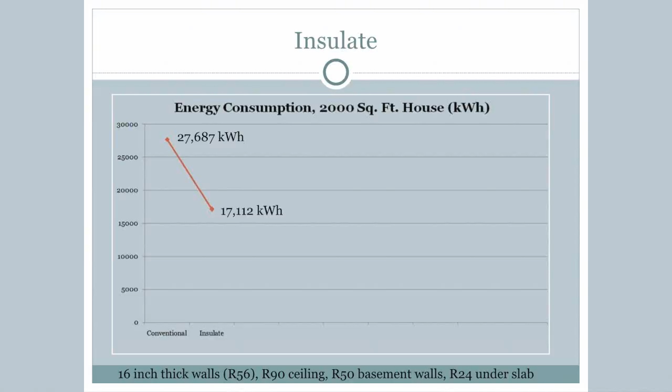There shouldn't be a concrete slab poured in Edmonton that does not have foam under it. It's insane. It will bleed energy for its entire life into that earth underneath. And so that's a crazy conventional practice that I really hope ends soon.

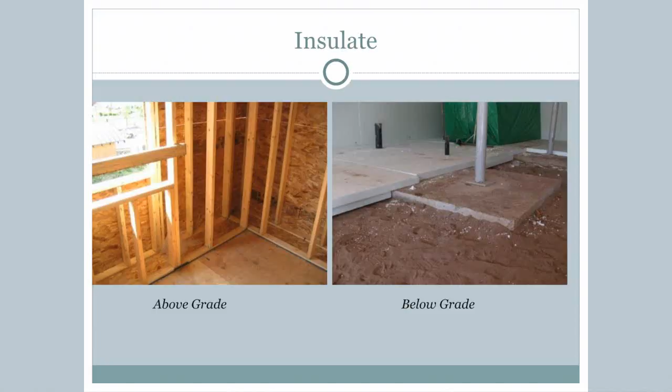So then what we did, moving from a conventional house, now we've insulated it, is sealed it. And so Peter has actually developed this framing technique by which very, very high levels of sealing can be achieved on a house, which means that not a lot of air from the outside can flow through the walls.

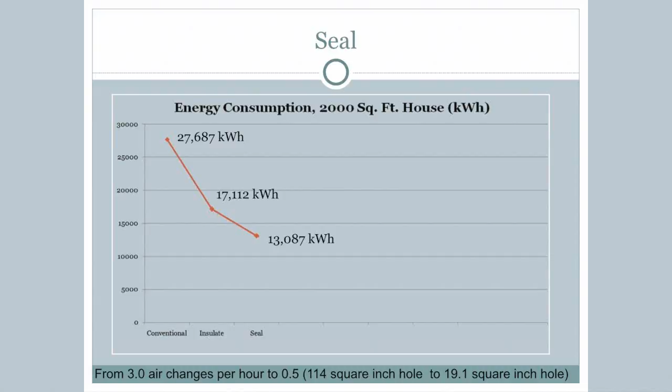Okay, so again, you can't see the words there, but this is moving from 3 air changes per hour, which is the equivalent of a 114 square inch hole, so something like that, to 0.5 air changes per hour, which is the equivalent of a 20 square inch hole in your house, if you added all the little leaks and cracks. We went from 17,000 kilowatt hours in heating load to about 13,000. So we cut it by 25% or so again. And this is Adam, the framer, doing some sealing details on the house.

So the next thing I did in the computer modeling was I just took the house and turned it towards the sun, 90 degrees. So just by doing that, recognizing that there's this big ball of fusion in the air, and actually designing a house with that in mind, we got 2,000 kilowatt hours more out of it. So another 15%. And I think lots of houses these days are built in large suburban areas, and they are pre-designed models that don't take into account which way the house is oriented towards the sun. So that's insolating the house, not insulating. In other words, bathing it in sun, right?

So then we made a huge jump from 11,000 kilowatt hours to about 3,700 by buying the best windows that money could buy. So fiberglass windows, triple pane. That's another thing. I morally disagree with the selling of double pane windows. Just don't do it. Don't buy them. Don't sell them. We live in Edmonton. It's cold here. So that time it lopped off about 60% of the heating load.

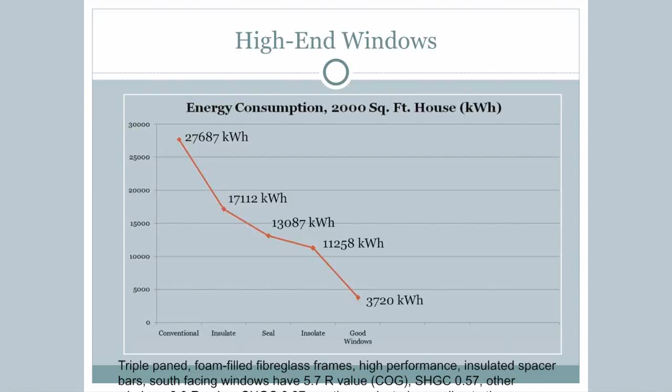Right. So the house, this is facing south, obviously, has huge windows and a lot of sun coming in. And again, we got very high-end windows. So the last thing we did was we added concrete floors. I think about 12 metric tons of concrete on the main floor, and then another 12 on the second floor. Now because we have such large south windows, if we didn't have this mass in there, we would fry in the fall.

So the sun is low during that time, and it's still relatively warm out, and so it would get too hot in the house. But with the concrete floors, they act as these heat batteries, and they keep it relatively comfortable. And then once the sun goes down, they radiate heat for the rest of the night.

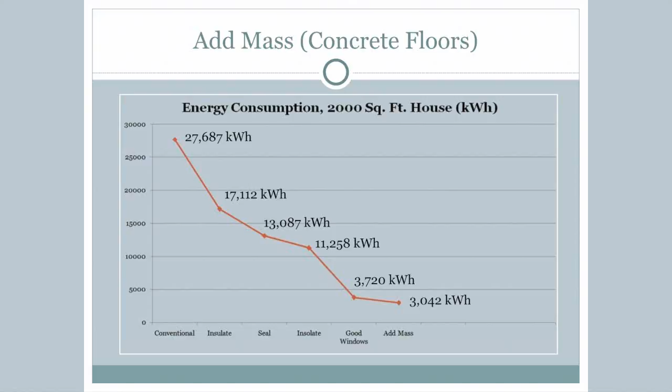So other aspects of the house, we don't have a dryer. We haven't had a dryer now for 15 years, because I didn't have one in my old house, and we're still around. So we've managed to survive without a dryer. I know it's crazy talk in the first world, but you can lop off 1,000 kilowatt hours a year of energy use, and I managed to make it here, even though I'm hanging my laundry all the time. No, actually, it's only like 20 minutes a week for me, and another 20 for my wife. We hang dry our laundry.

We also had energy efficient appliances and lighting, permaculture landscape for the food aspect. We live in a very walkable neighborhood. That's actually not true anymore. We just bought a car. My 2 kids are in hockey. Hockey broke me. After 7 years living without a car, now we have one.

We also wanted to increase density, and at the time there wasn't a basement suite allowed on the lot with our zoning, but now there is. So our modeling showed, and it isn't exactly the same as what I ended up at because we went through so many different iterations, about 3,000 kilowatt hours a year for space heating, about 3,200 a year for domestic hot water heating, and then 4,400 a year for our appliances, for a total of about 10,500.

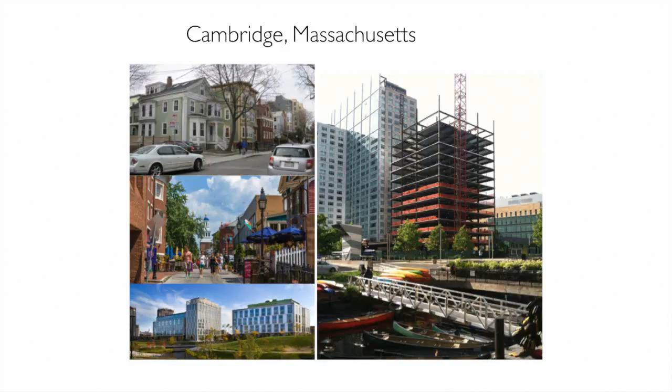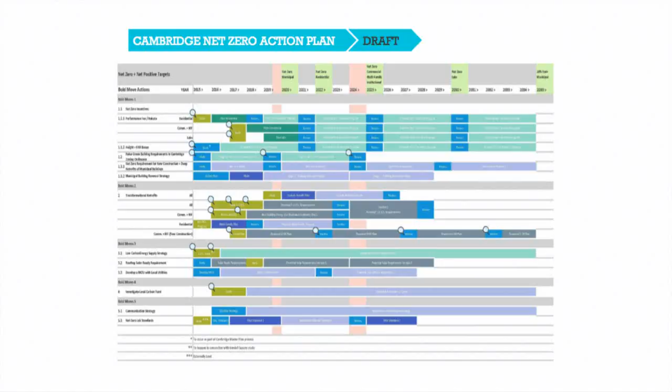They're building net zero energy buildings in Massachusetts. They're aiming for net zero energy in all new buildings by 2030, building jobs and energy around it. The city of Cambridge, who's really taken a kind of a gritty look at this, is aiming for net zero energy for the whole city, not just for the building. And they've done a really comprehensive roadmap where they've looked at every energy component: driving, transportation, building energy, municipal services, and developed a roadmap to get them down to around 70% by 2040.

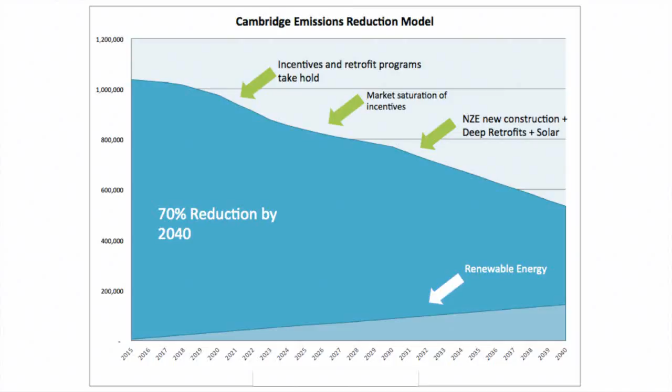So this is what we're up against if we want to be leaders. We really got to get going, and I think net zero energy housing is part of that. The DOE has done a great job in helping builders sell this stuff, looking at the value proposition, which I'll talk about a little bit toward the tail end here.

And then the passive house movement, I mean, based on what our Saskatchewan pioneers have built, they've taken this fairly simple approach and built the highest building energy efficiency standard in the world. They've now got about 30,000 of them in Europe. They're getting to be more and more in the US and Canada. And it's by far the best platform for net zero energy building.

The City of Vancouver is now recognizing it in their planning process. So is New York. Even President Obama is pointing at passive house as the way of the future. So I'm not going to dwell on this, but in addition to looking at energy, they've also gone further and looked at durability, and they're designing building assemblies that are not only energy efficient, but they're also highly durable.

Because when you think about it, the embodied energy of a building is the energy that goes into its construction, and that's all up front. That gets expended today. The rule of thumb is that the embodied energy of a building is roughly 10% of the total energy that building will use for heating and other energy needs. But if you cut that down by 90%, all of a sudden your operational energy and your embodied energy are equal. And the only way to do much about that is to make darn sure that building is going to last twice as long, because then that number looks better.

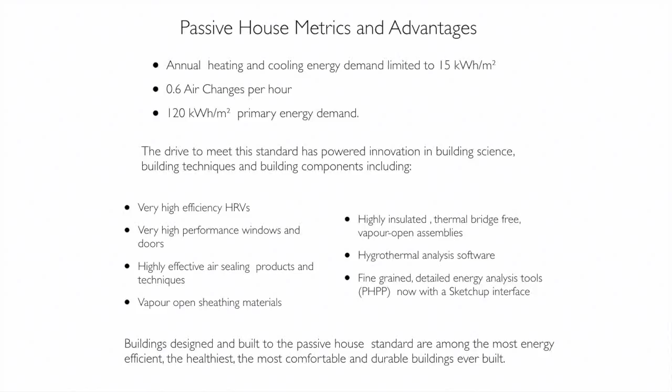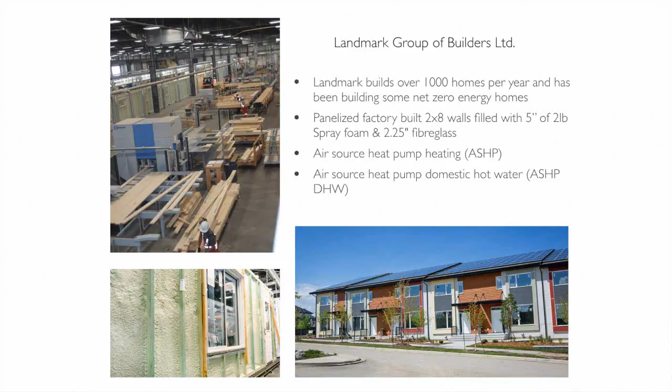And so we've borrowed and stolen all kinds of little bits of the passive house technique to make our houses better and to make them more affordable. And back here in Alberta, we've got Landmark. Reza said this morning it was about 880 houses last year, and they're moving towards net zero energy houses in their factory, and have taught us that you can actually heat houses in Edmonton with air source heat pumps, which I'll talk about a little bit more as we go along. And then there's the Mosaic Centre here in Edmonton.

So we're on the right track, but our numbers, when the mayor brags about having 35 or so, I don't think he used that number, but that's what we have now, net zero energy dwellings in Edmonton. That's great. That's more than anywhere else in Canada, but it's also terrible that 35 is the highest number in Canada. We've got so far to go.

So we've done 10 now. These are the first 6, the first generation where we were focused heavily on passive solar, and they were on decent sites, except for the Holyrood one, which had a really huge, expensive solar thermal system. But basically we were taking advantage of the mass and glass, or at least glass, approach to get a big chunk of our heating energy from the sun, and we're still doing that, but there are limits, and besides, we can see with Conrad's house, we're not quite there, and that's true of most of these houses. I'll show you one in a minute that's doing great with that approach, but in all these cases, we've learned from the house before, and we're constantly fine-tuning.

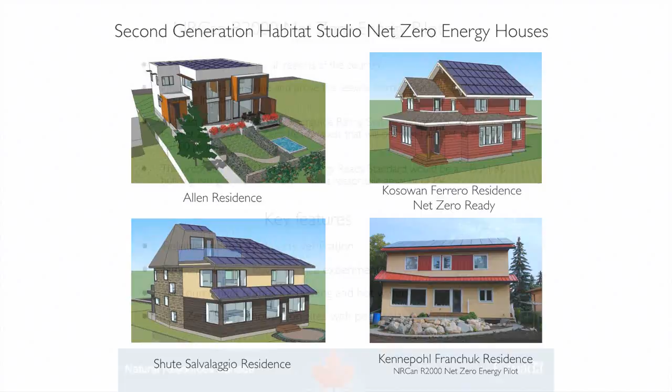The house in the bottom right there was part of a program that Natural Resources Canada has run across the country to try and mainstream this more. They've restricted us to simple systems, no more science experiments, and we're happy to say that was the first one finished in the country.

But even the CHBA, who haven't been the most advanced in terms of leading energy efficiency, are on the bandwagon. They're seriously working towards a net zero energy labeling program that will be available across the country, that will give homeowners quality assurance so that when the builder says it's a net zero energy house, they've got a label on it that's third-party verified and lets that homeowner know they're getting what they're paying for, and it's not just some builder salesman like me telling them this is the best thing since sliced bread. It's really something you can take to the bank.

So in all of this, our recipe hasn't changed that much. As I say, we've been fine-tuning it, but we learned after about the third house that really it didn't need to be that complicated. It was a step-by-step process that you could take to net zero energy. I'm not going to go through the whole thing, but I will talk about some of the things that we're doing differently now than we did before.

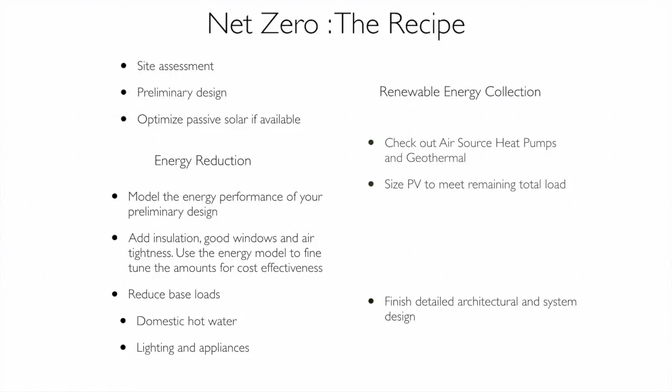So we're capturing most of it. This house is actually producing a surplus of about 4,000 kilowatt hours a year, year in, year out since it was built. I mean, Conrad's got 5 people living in his house. We've got 1 living in that house. That's probably part of the difference.

Plus, I think that we're sort of hypermiling this house. Like you know, when you buy a Prius and you coast down all the hills and squeeze every bit of energy. Well, I think the homeowner is doing that here, but nonetheless, it sort of works that way.

And so after this, I thought, oh great, let's just build on perfect lots all the time. Well, the fact of the matter is, perfect lots don't exist. Maybe there are 1 in 20, 1 in 30 in Edmonton. We've got these lovely boulevard trees. We've got other houses. Most of them face the wrong way. So obviously that's not going to work.

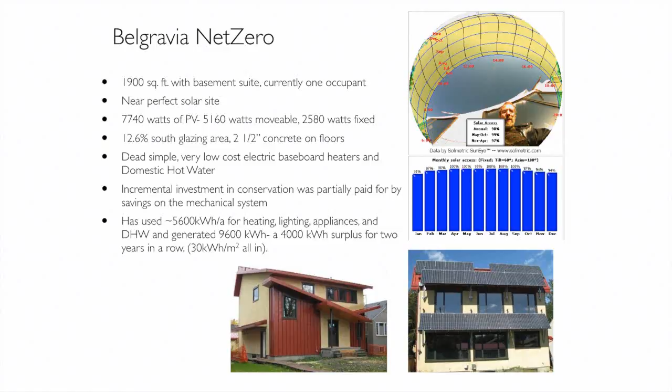So you can see on this house we've angled the roof so that we got the solar panels facing at the optimum angle so we get the most amount of juice out of every square foot of panel. Well, that's changed too. Now that they've gotten so much cheaper, we're actually sloping the roof the other way so we get more area to put more panels on. We're finding we're putting a lot bigger arrays on the roof, and that we need them to make up that sort of shortfall. But it's kind of interesting how that has changed.

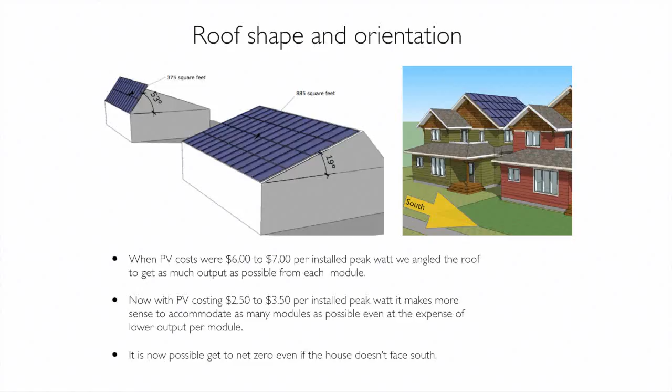We're also finding now we can get to net zero with east and west facing houses by just getting the sun over top of the roof. And I think this is something that Landmark has found in their work and makes it possible. Because if it's a solution that doesn't work on anything but the perfect lot, it's not really the solution. One thing that hasn't changed, and Conrad talked about it a little bit, is the need to start off with modeling.

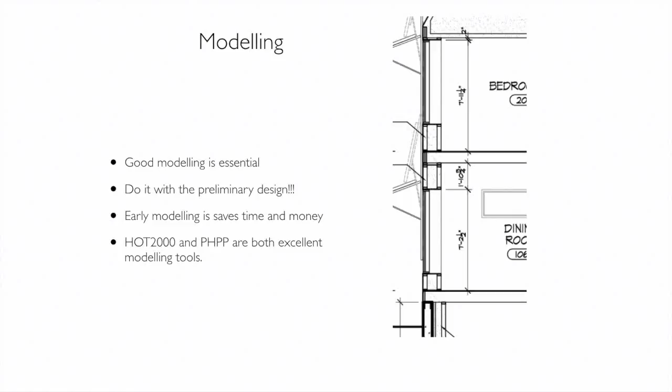I apologize to anybody who was here in the previous session, but if you don't start with good modeling, you can't possibly get there cost effectively. It has to be done early. I've had people come up to me after giving talks, and they had just done their building. This one was a farm couple in Manitoba, and they wanted to do the right thing. They put in lots of insulation, but they didn't pay much attention to air tightness, and they only put in double glazed windows, and they weren't going to get there.

The other guy was a mechanical engineer. He built with 2x8 walls, and also didn't pay too much attention to air tightness, and there was just no way that was going to be an energy efficient house. He had so much wood conducting energy through those walls and no continuous layer of insulation. He's a mechanical engineer, and he didn't do any modeling, and both these guys are done. They're not going to fix those houses ever. And I mean, it's simple.

The energy model tells you where all the components of energy loss are going in the house. You can easily play with the dials and say, what happens if I add, in this case here, a couple more inches of insulation to the floor? How much energy will it save? How much will it cost? What's the cost per kilowatt hour per year to save that energy? And how does that compare with the last increment on all the other things, the attic insulation, the wall insulation, the air tightness, the efficiency of the HRV, the efficiency of the heating system?

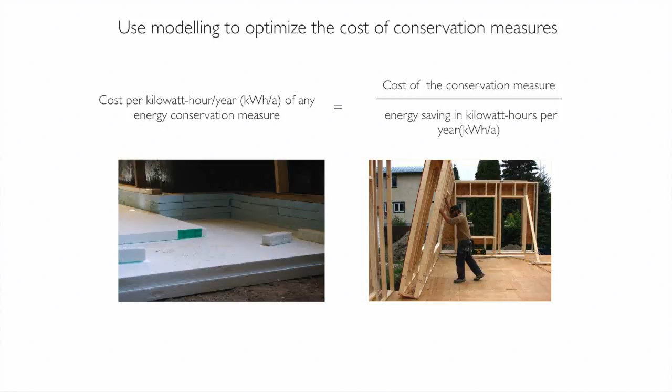You can use it to dial all that stuff in so that you can get the lowest possible cost solution for your building. And you don't have to do this many times. We've done this, and we kind of have a formula now that's our starting point in every building. And unless we see some kind of anomaly, it's not much extra work.

And one of the things that we've learned from the passive house approach is how important thermal bridging is as the insulation levels go up. So you can see, if you have an R15 wall, the amount of conductance from thermal bridging isn't that big a proportion, but once you get up in, say, the R40 range, that's looking like a bigger number. It's like bigger than the conductive losses through the wall.

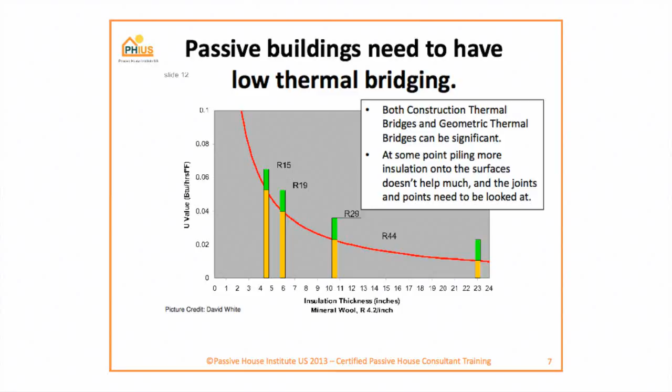So it's really worth looking at these little details, and one of the great things about the passive house approach is that it forces you to quantify all those things. It's also helped us in the air tightness department. The passive house economy in Europe has resulted in the development of all kinds of better windows, better HRVs, all kinds of cool tapes that will rip the hair right off your arm, that will stick to everything and forever, that help you make buildings way tighter.

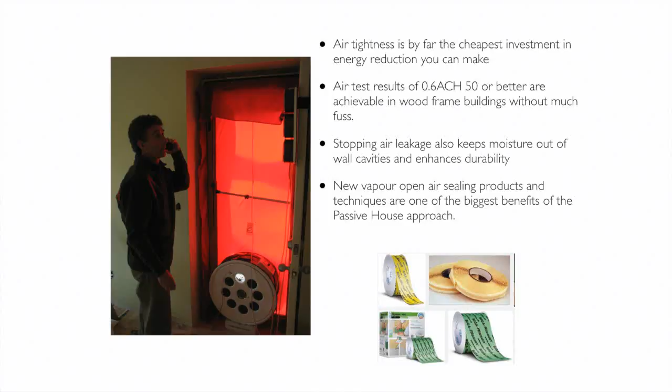And it also raised the bar. You know, we used to think 1.5 air changes an hour was good. Now we're aiming for 0.6 or less. I mentioned windows. Some of the passive house windows from Europe are light years better than what we can get here in North America, and some of them are actually getting to be reasonably priced.

But if you're looking for windows for a project, you want to focus on the highest R value glass, obviously. Match the solar heat gain coefficient to the situation, so if you're after passive solar, you're getting it. New glass now has very high R value and good solar heat gain coefficient. That's an improvement from Conrad's house. In fact, that one thing would probably have brought Conrad closer. There's a couple of things that would have. Even the new solar panels now have way more efficiency. So if we'd put on the same area of solar panels, they would have been less expensive and just about made its deficit, I would think.

Now you tell me. I know. Well, that's what I said when I thanked you for helping us learn at your expense.

So with windows you want slim profile frames. The good part is the glass. The less frame, the better. That's more of a heat loser than a gainer, and you're putting it in for light in the first place. And the fewer small windows you put in, the better. Fewer windows with less frame and framing are going to use less energy, give more light, and cost less too than a bunch of small windows.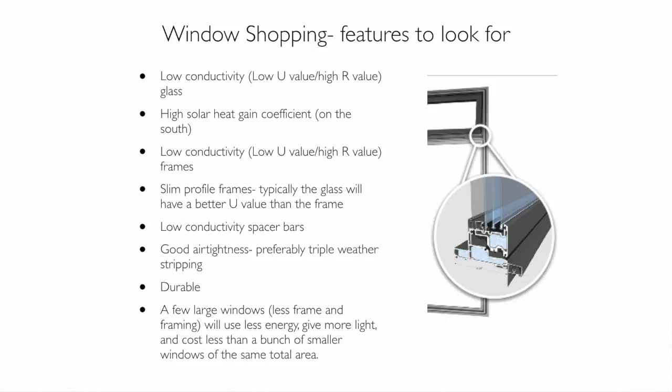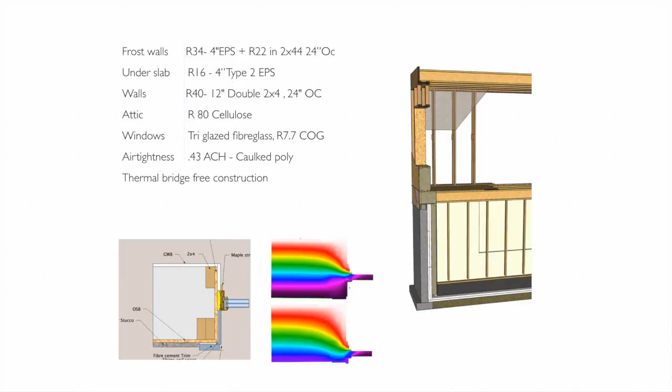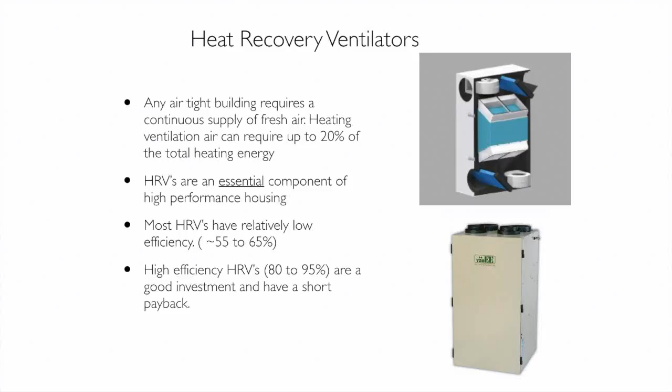So in a nutshell, this is kind of our formula going ahead. We've dialed back a little bit on the walls. We're at R40, and in Conrad's it was R56. We're putting a little less insulation under the slab and the frost walls. Attic's about the same because it's cheap, and we're aiming for as tight as we can get and thermal bridge free construction. Another big change is heat recovery ventilators. We can now get European ones that are much more efficient, use way less energy to run the fans, and hopefully will drive North American manufacturers to do the same.

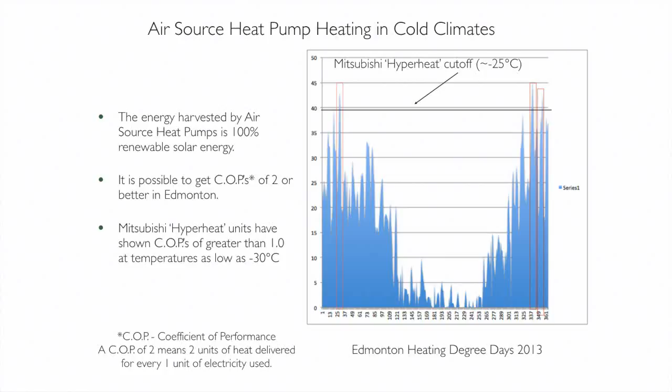But the biggest thing probably is the availability now of low temperature air source heat pumps. That's a degree day graph for Edmonton for the winter of 2013. A heating degree day is a day when you need to heat your house 1 degree. So if it's minus 30 out and you want it 20 inside, that's a 50 heating degree day. Most of the heating season actually occurs at temperatures where these things will work, because the air source heat pumps, believe it or not, can extract heat from air down to minus 25.

So you may think it's cold out there, but it could be colder yet, and that's what the air source heat pump does. It's actually cooling that air down below that temperature, squeezing that heat out, and putting it in your house. And somewhere in the minus 20, minus 25 range, that thing won't work, and you've got to flip over to pure electric resistance heating. But most of our winter occurs at temperatures above that, so these things work reasonably well. In fact, we have more winter at temperatures above minus 20 than most parts of the world have altogether. So we actually get more benefit out of these things than the people in Vancouver and more temperate climates. So they actually make a lot of sense.

We've got them now in 2 houses. We've got 2 more that they're going into, and so far they seem to be working okay. Now I would not put one of these things in a house unless you're powering it with renewable energy. If you're powering it with grid electricity, you're probably better off to stick with gas. But if you're trying to get down to that net zero range, they will do 2 things. One is they'll shrink the size of your solar array so you might have room on your roof, and they'll save you money on that solar array, and they'll also reduce the amount of electricity that you send to the grid and bring back, because there's a cost to that too.

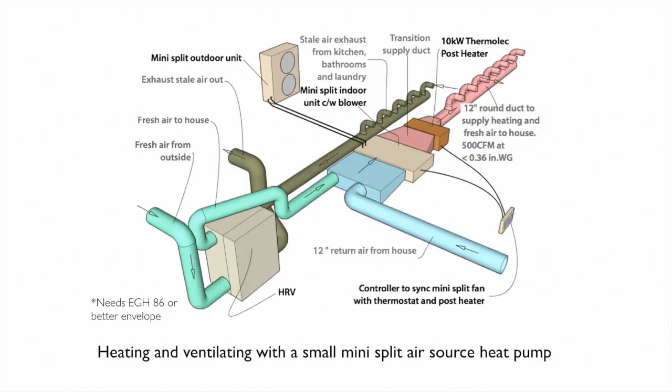And I mean, this is a schematic of how these things work. It's with the mini split, which is what we're using. They're very small, and they mount on the basement ceiling. It's a pretty simple system. We tie it in with our HRV. On bigger houses, we have to go with bigger ones that look a lot like a furnace.

So the other one is using air source heat pumps. Now these are for domestic hot water. These are electric, and they're also a little counterintuitive, because in the summer they're great because they tend to cool your house, because they're basically heating the water by extracting heat from your house air. But in the winter they're cooling your house, which is not such a great thing.

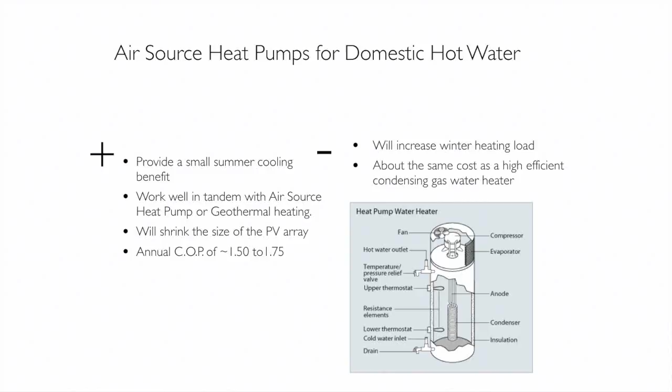But if you're replacing that heat with an air source heat pump, then combined you can actually get a reasonable efficiency out of these, where you're contributing to less electricity import, export, and also shrinking your PV array.

So, in a nutshell, are we there yet? Yeah, I think we're there. Not only can we do it, but we have choices. We can sort of dial in the amount of energy conservation. If we've got the roof area for a big PV array, you can actually go with a big PV array and air source heat pumps, and I think that's largely the approach that Landmark has taken.

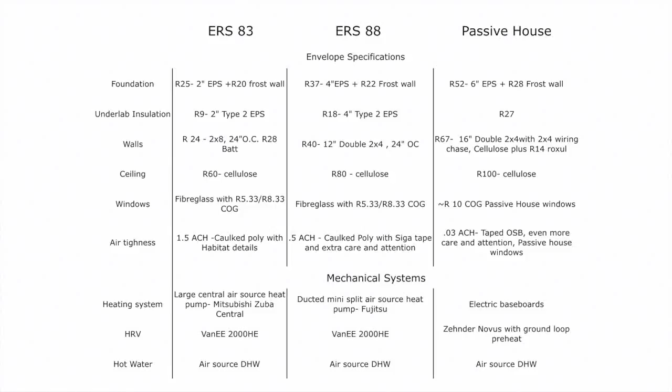We, for about the same cost, are able to upgrade the building envelope, put in a smaller heat pump, and shrink our PV array and have about the same incremental cost. I mean, in a perfect world, we would be building passive houses with tiny PV arrays, but it tends to be more expensive. And so the recipes look like this. The print is small. I won't dwell on this, but there are choices.

And the real value proposition: when we did the first one, the incremental cost on the Riverdale duplexes was over $100,000 per unit. That was not going to go anywhere, but we're down now to the $40,000 to $50,000 range to have essentially no heat bill ever, a cheaper house to operate, more durable. And I think that it becomes more compelling. And that price premium is going to fall as the building code improves.

We've just seen a jump in the building code here in Alberta, so that means that every other construction is going to be more expensive. If we add in a carbon tax and start paying the real price for energy, I think that the business case for this will be fairly compelling.

And then consider that these are just plain better houses. They're luxuriously comfortable, they're healthier, they've got this constant supply of fresh air, you've got the peace of mind of knowing that you can look your kids in the eye and say, we've done what we should. They work better, they tend to be simpler, well thought out from a building science point of view, more resilient in a disaster situation where the power goes off.

And the next step is to take this to multifamily. So we're now working on a 16-unit stacked townhouse project for the Intermet Housing Society for large immigrant families over in Westmount. We're pretty sure we're going to get it to net zero. We're hitting passive house performance. The metrics change a lot when the building goes up. There's so much less exterior wall for the amount of enclosed space that the business case is a whole lot different.

And it's also different for nonprofits. These people are not going to flip these buildings. They're anticipating owning this building forever, and they're not only paying the construction costs, but they're also paying for the energy costs and the maintenance costs. So it's all one budget, all one pocket, and it's really compelling for them to make the best building they can for the long term.

And now we've got Blatchford coming along here, which is really exciting. So we're treating this project for the Intermet Housing Society as kind of training wheels for Blatchford.